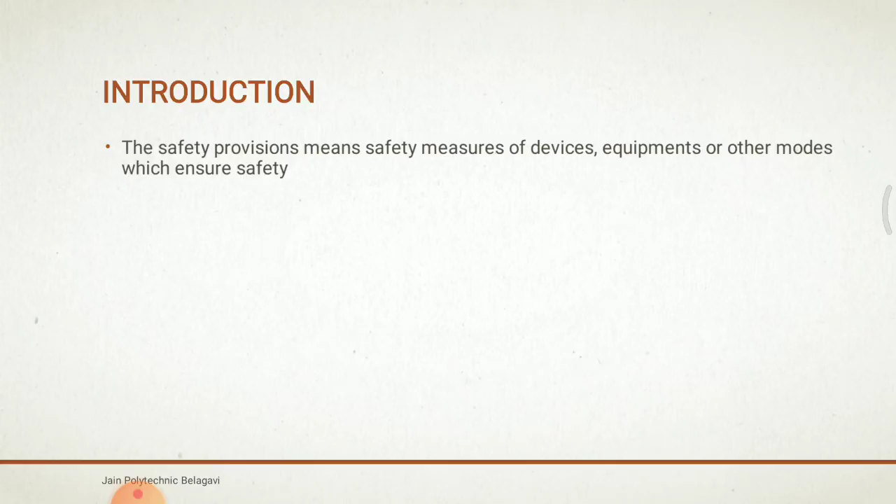Today I'm going to discuss safety provisions under the Indian Factories Act 1948 in order to make safety for the employees, workers, institution or management. There will be some rules and regulations made by the Indian government. Safety provisions mean safety measures, devices, equipments or other modes which ensure safety. For example, the presence of a guard enclosing a rotating part of a machine, etc.

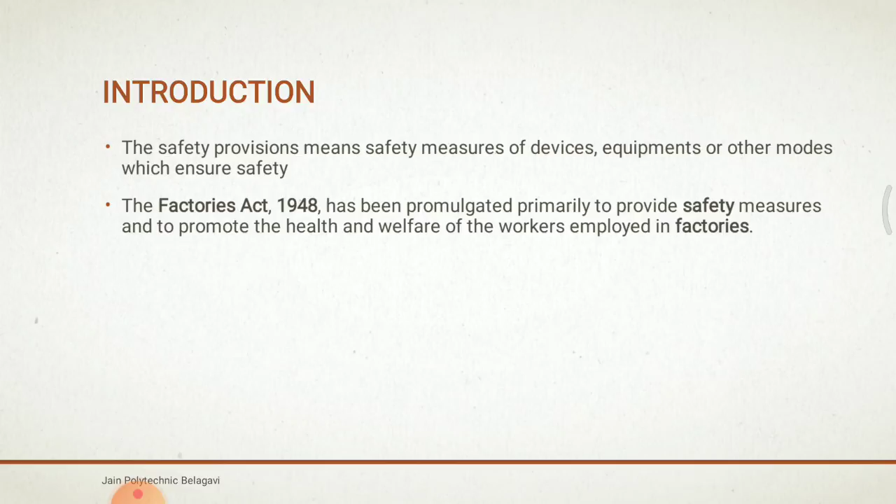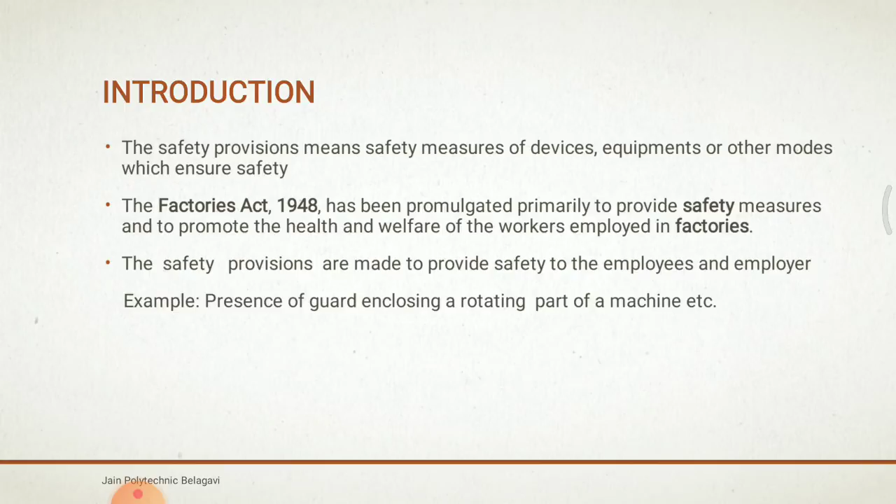The Indian Factories Act 1948 has been established primarily to provide safety measures and to promote the health and welfare of the workers and employees working in factories. The safety provisions are made to provide safety to the employees and the employer, such as the presence of a guard enclosing a rotating part of the machines.

Safety provisions under the Indian Factories Act 1948 are: first, fencing and guarding must be provided for rotating parts such as flywheels, water wheels, and moving parts of motors or generators. Safety safeguards should be provided for the employees, and lifting devices such as cranes, pulleys, block rings, hooks, etc. should not be loaded beyond the permissible limit.

There will be some limits set according to the government of Karnataka, state government, or central government. The government has made rules and regulations for lifting equipment, with certain limits that must be followed as permissible limits.

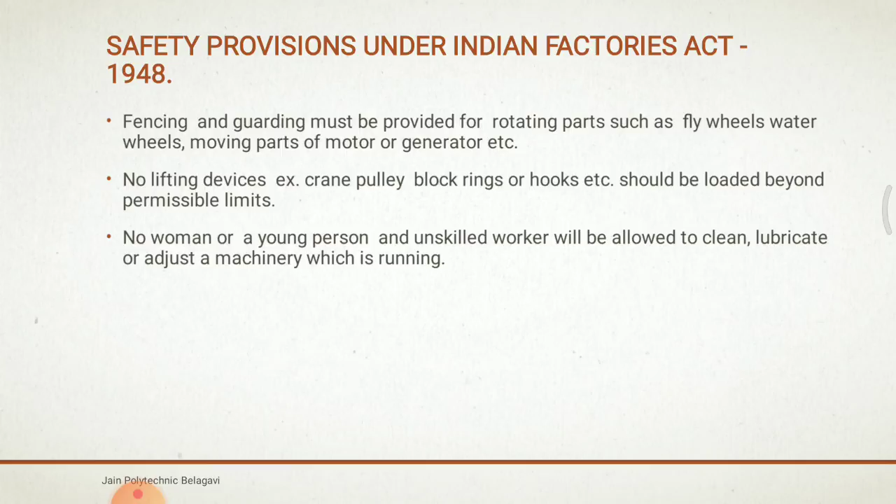No woman, young person, or unskilled worker will be allowed to clean, lubricate, or adjust machinery which is running. In order to be safer and avoid accidents, only skilled persons can be sent to do the lubrication, and a suitable mechanism should exist for shifting belt drives.

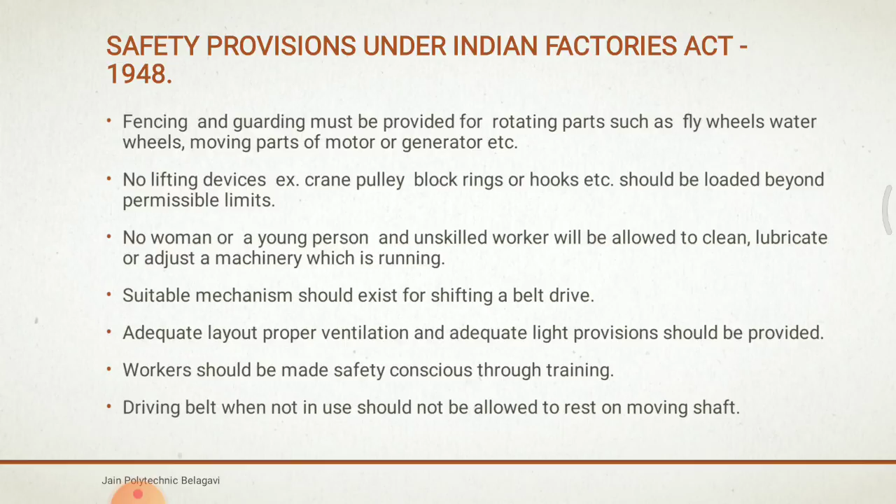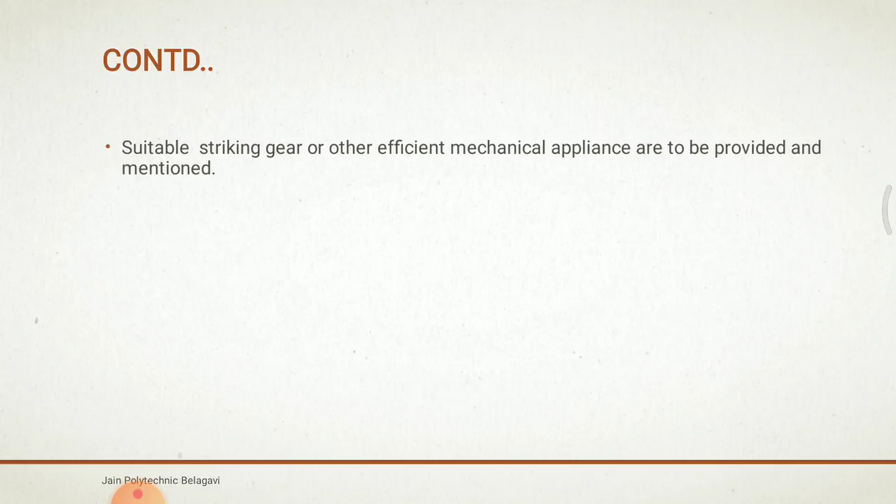Adequate layout, proper ventilation and adequate light provisions should be provided, and workers should be made safety conscious through training. Driving belts, when not in use, should not be allowed to rest on moving shafts. Suitable striking gear or other efficient mechanical appliances are to be provided and mentioned.

This applies when a person has to work at a place from where he is likely to fall a distance exceeding 2 meters. Also, all machinery driven by power and installed in a factory must be cased, and a notice permanently fixed near each machine indicating the maximum safe working speed is required.

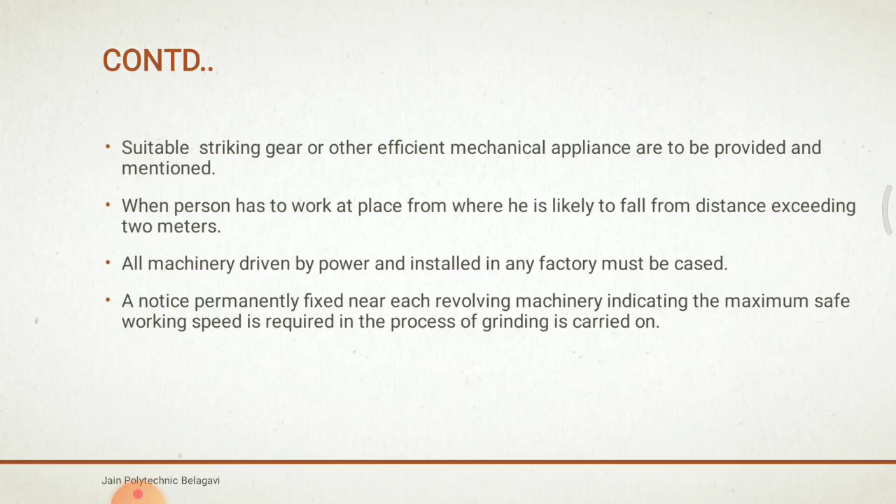In the process of grinding, this is carried out. So in this session we have discussed Safety Provisions under the Act of 1948, in order to provide safety for the employees, industrialists, or management. Some rules or regulations are to be made for all.

Workers should be made safety conscious through training, which must be provided. Some rules and regulations are to be provided, and punishments given, since sometimes people will violate them purposely. In order to avoid that, the Indian government made this Factory Act to provide safety to the employees and employers.

There are also provisions made by the state governments regarding lifting parts or weights. For weighted materials, there are permissible limits to how much weight can be lifted, as made by the governments. Thank you.